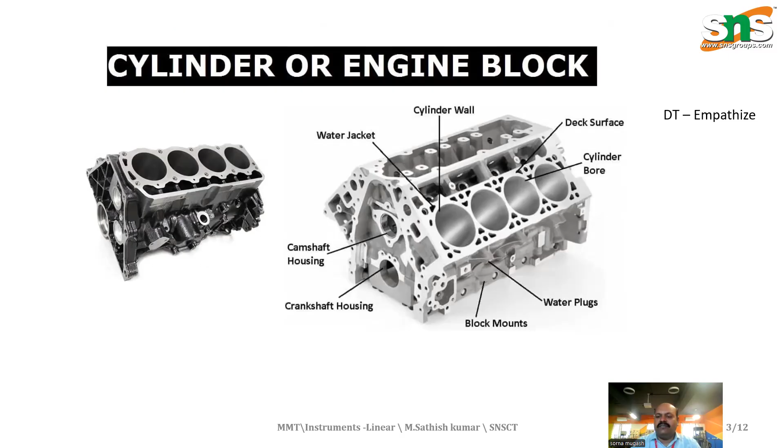Whenever we measure with the help of a vernier caliper, it is measured only in part of the surface of the cylinder. But when we measure with the bore dial, it has to be measured throughout the length. That is why we go for this bore gauge. Let us explore this bore gauge in depth.

It is a precise measuring instrument. It allows for necessary modifications. It is used exclusively for measuring internal diameters. This is a telescopic gauge, which measures internal dimensions accurately. It ensures precision in various projects like automobile as well as other manufacturing processes. Accurate measurement is essential for this instrument.

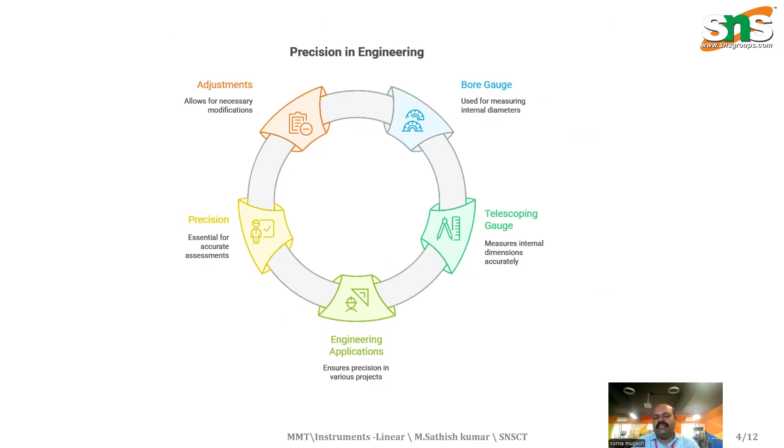Bore gauge accuracy ranking: we have a dial bore gauge, a 3-point bore gauge and a 2-point bore gauge. The 3-point bore gauge touches at these 3 points. As the instrument is shown here, we have 3 different points and a measuring display. When we plunge this instrument inside the bore, the contact surface is at the 3 points. Whenever the number of points increases, the accuracy of the measurement increases.

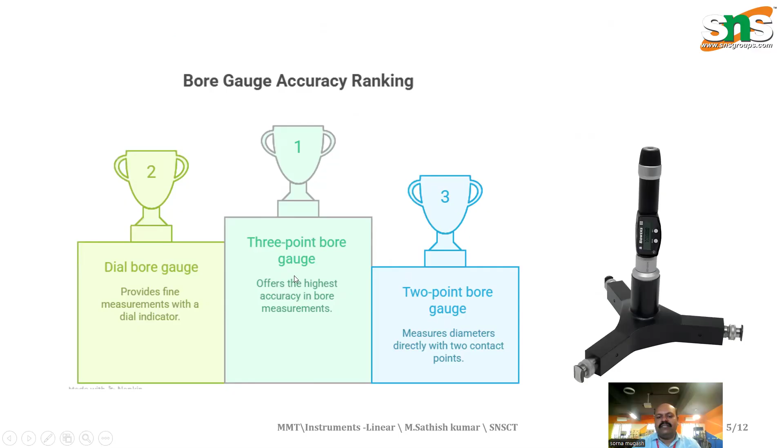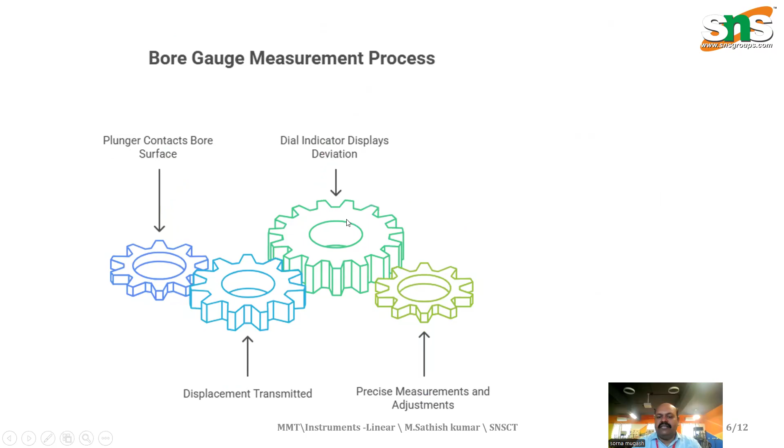The 2-point bore gauge is also there, and the dial bore gauge, which provides fine measurements with the dial indicator. The 3-point bore gauge ranks number 1. The plunger contacts the bore surface and the displacement is transmitted, the dial indicator displays the deviation in the bore, and precision measurements and adjustments are made to find the bore.

Engine cylinder bore assessment is evaluating the engine condition. That is very important. Inner diameter measurement: we are assessing pipe and sleeve dimensions, and the tolerance in machining, ensuring precision in manufacturing. Quality and functionality: we achieve desired component performance.

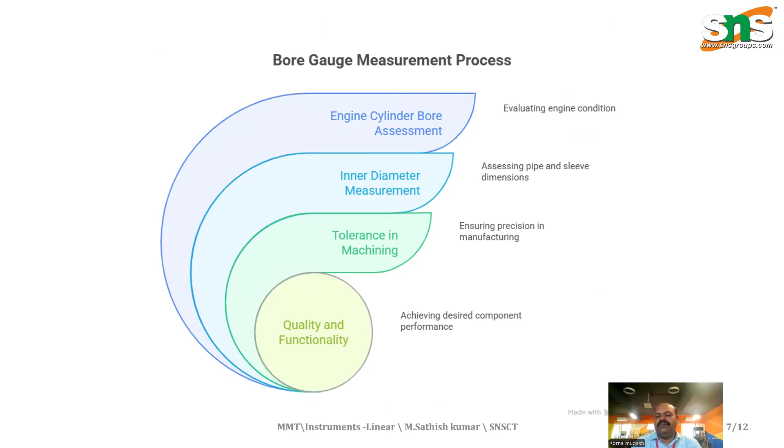The telescopic gauge is used for measuring internal bores indirectly. Expandable spring-loaded tips lock inside the bore. That is very important. When we insert the telescopic gauge, it locks with the diameter of the bore. The measurement is taken using a micrometer or vernier caliper after the telescopic gauge has been taken out. Which tool should be used for measuring internal bores, micrometer or vernier caliper? No, it is a telescopic gauge.

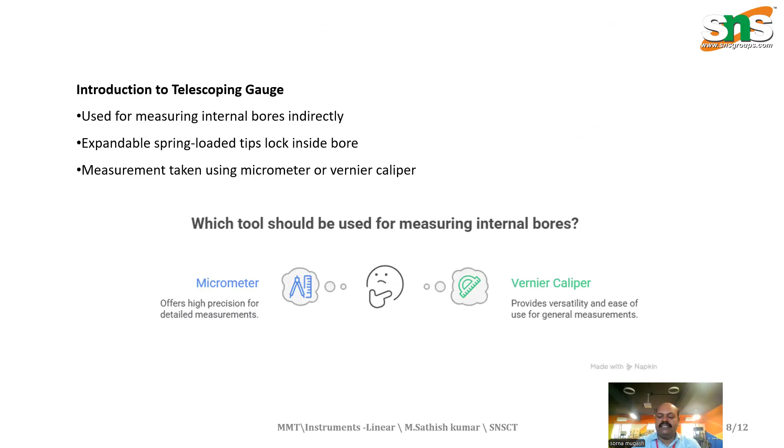Applications of the telescopic gauge are checking internal diameters of small to medium bores, suitable for locations where a bore gauge cannot be used. It is common in tool rooms, maintenance and inspection. Which gauge should be used for measuring internal diameters? The telescopic gauge as well as the bore gauge.

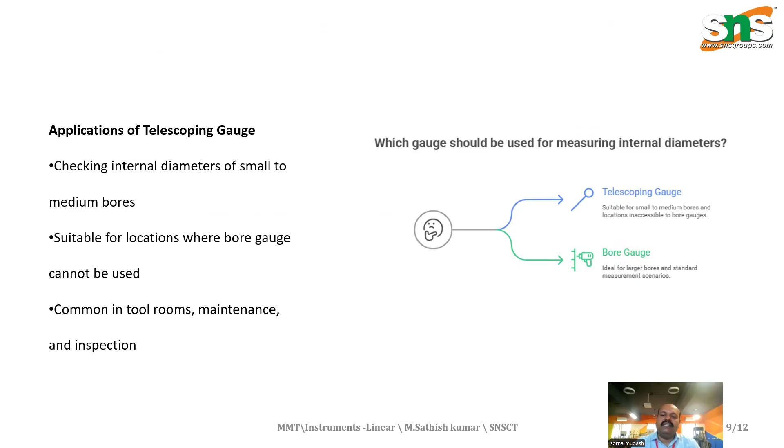So let us summarize the topic, that is bore gauge and telescopic gauge. We have general information on both gauges. Bore gauges will never measure. That is very important. It only shows whether the standard is up to the tolerance limit or not. In the bore gauge, we saw what a bore gauge is and the types of bore gauge: 3-point, 2-point, as well as bore dial gauge.

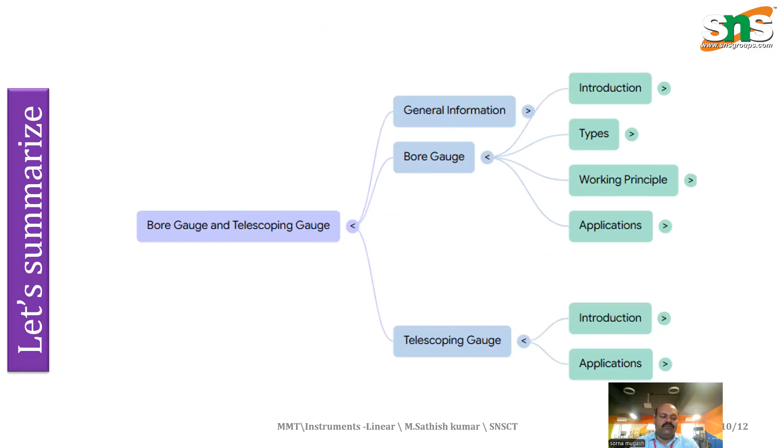We have seen the working principle with the help of the diagram. The applications we saw in the empathize part, where the engine block or various sleeves are measured. The same way we have seen the telescopic gauge. This is the assessment: which instrument gives direct reading of bore size? Bore size is measured with the help of the bore gauge. Telescopic gauge measurements are finalized using a micrometer. These are the two assessments you should know.